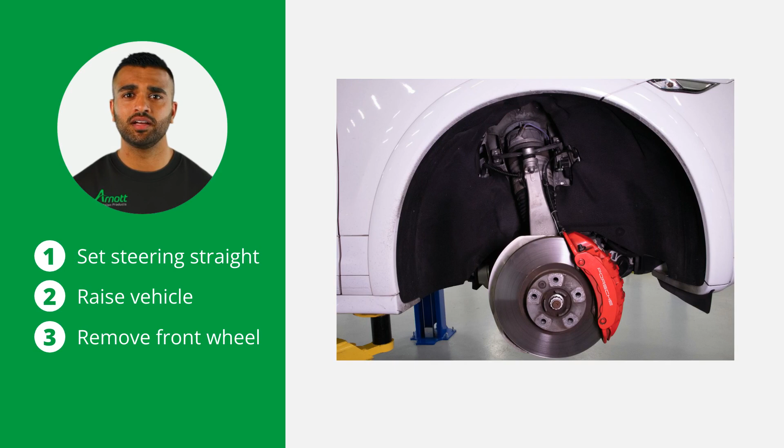Start by setting the steering to straight ahead. Now raise the vehicle and remove the applicable front wheel. Open the hood and remove the applicable engine bay trim to access the strut's top mount and electrical connector.

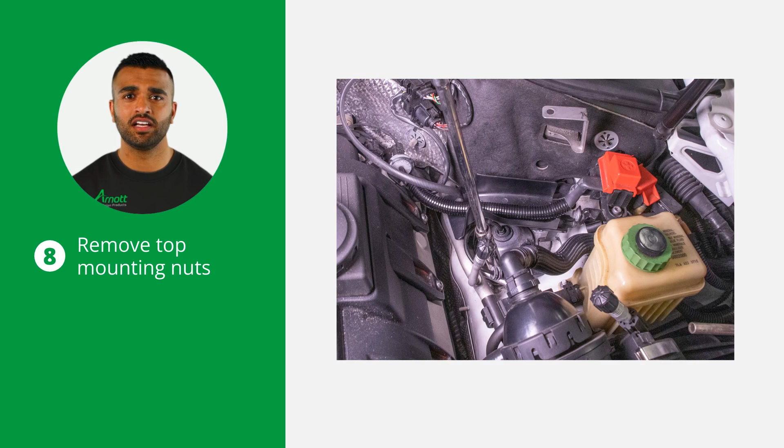Next, remove the engine strut damper. Now it's time to remove the electrical connection to the strut. When the electrical connection is disconnected, loosen and remove the strut's top mounting nuts.

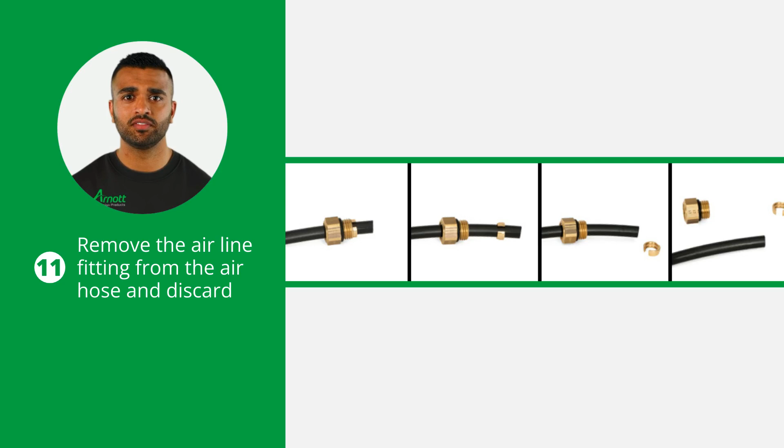The next step is to loosen and remove the airline and then remove and discard the OE air fitting. Prior to inserting the existing airline into the new air strut, remove the old airline fitting from the air hose and discard it. To do this, slide the threaded portion up the line and spread the collet open to remove. Then slide the air fitting off of the airline and discard.

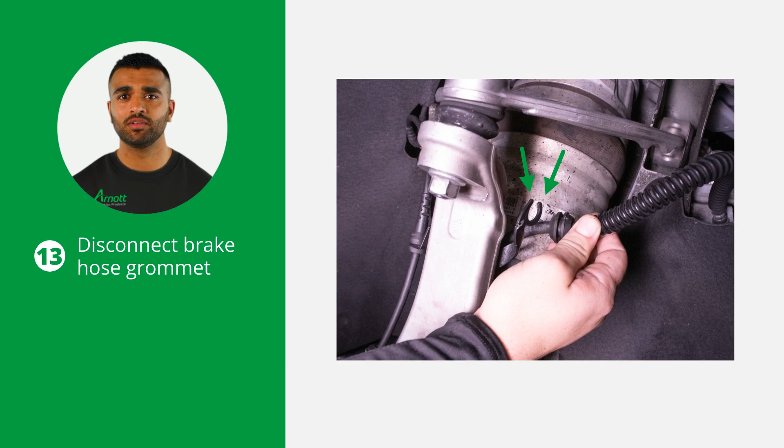Continue by disconnecting the height sensor linkage. Disconnect the brake hose grommet. Now disconnect the ABS sensor grommet and connection.

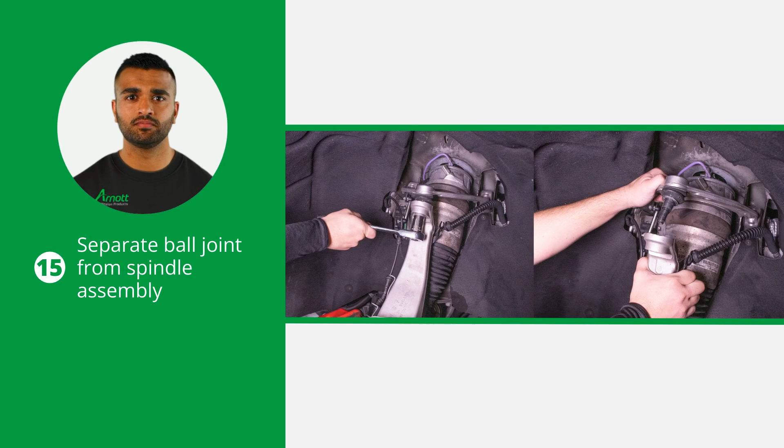Next, separate the ball joint from the spindle assembly. Loosen and remove the top sway bar end link bolt and nut. Also loosen the bottom sway bar end link nut, but make sure you do not remove it.

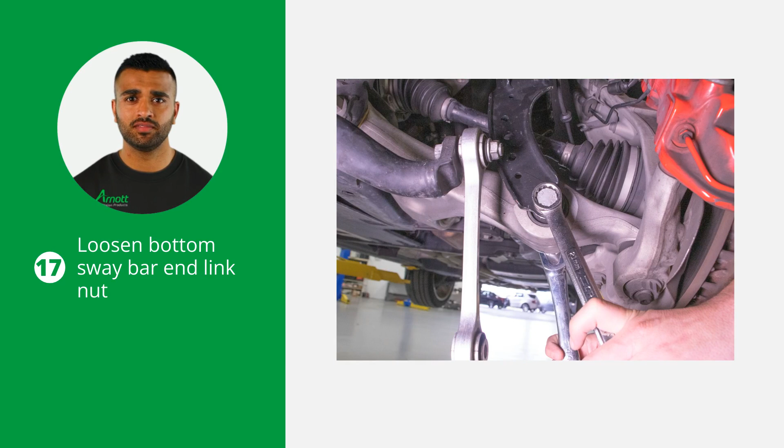Finally, loosen and remove the lower strut bolt. You can now remove the strut from the vehicle.

Start installing the new Arnott air strut into the vehicle. Ensure you tighten all nuts and bolts to the vehicle manufacturer's specification.

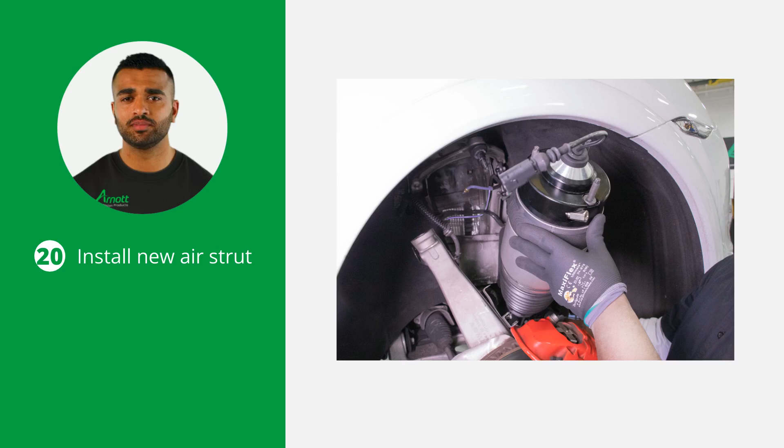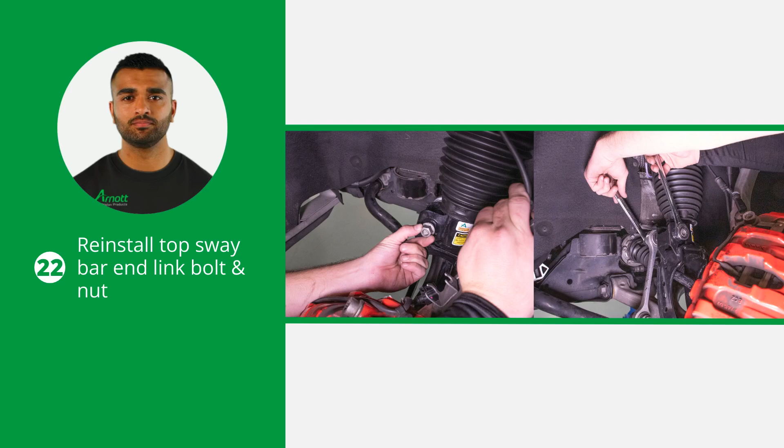Reinstall the lower strut mounting bolt. Reinstall the top sway bar end link bolt and nut. Now tighten the bottom sway bar end link nut. Reinstall the upper ball joint nut.

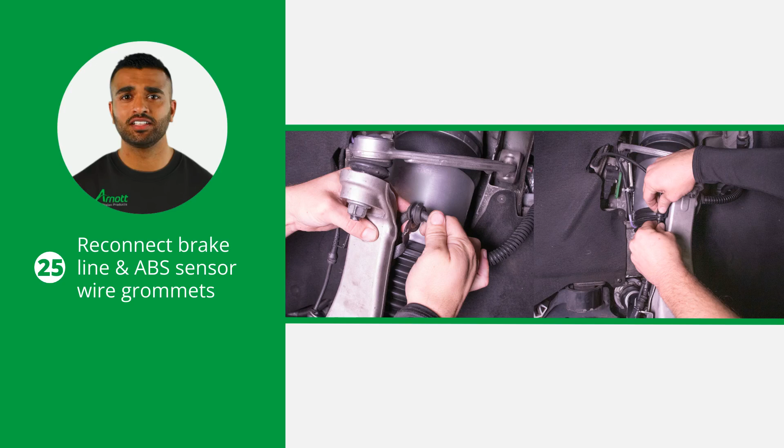Now start reconnecting the sensors. Begin with the brake line and ABS sensor wire grommets. Next, reconnect the ABS sensor wire. Finally, reconnect the height sensor linkage.

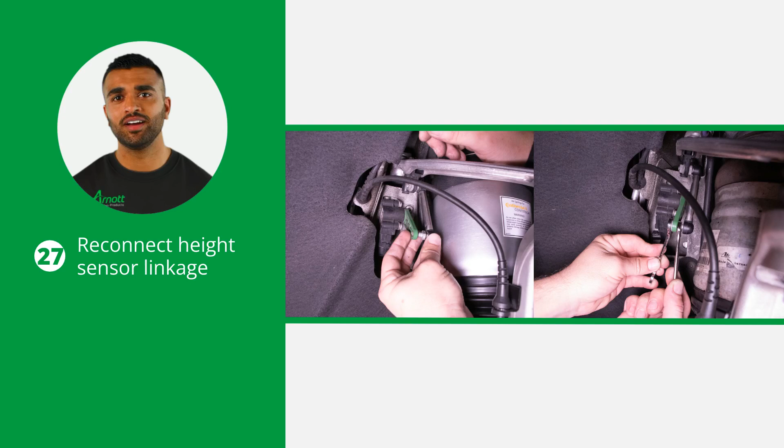Install the Arnott air fitting to the existing air hose by removing and disposing of the shipping pin and inserting the airline through the fitting. The airline should be approximately 6 to 8 millimeters below the collet. Pull the air fitting outward to lock the collet.

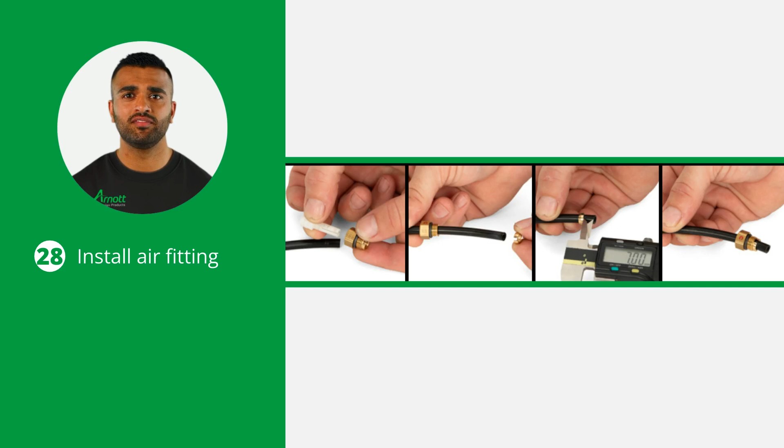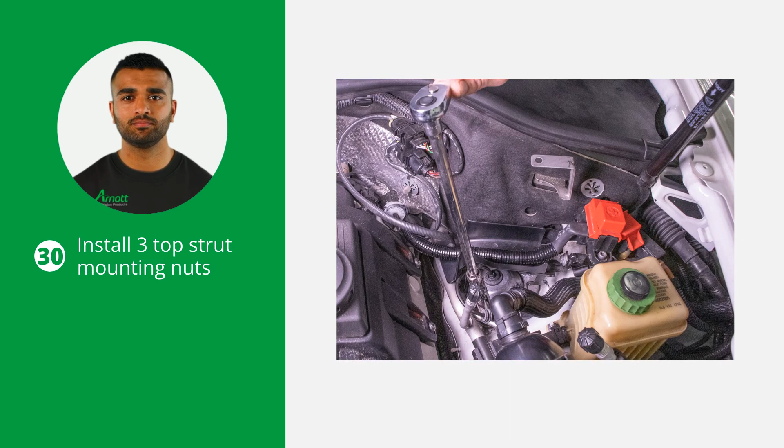Now, reinstall the airline. Install the 3 supplied top strut mounting nuts and tighten. Reconnect the air strut's electrical connection. Reinstall the engine strut damper.

The final steps are reinstalling the side trim cover under the hood and installing the wheel. After this, you can lower the vehicle and the installation is complete.

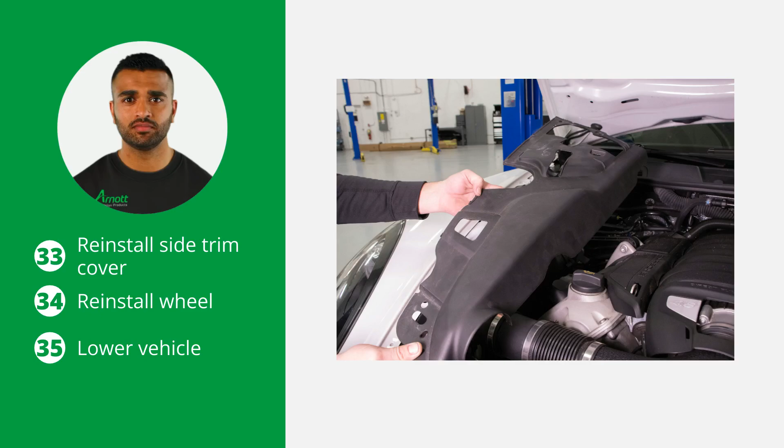Thank you for following our guide. Proper installation ensures the longevity and performance of your vehicle's suspension system. Stay safe and happy repairing.